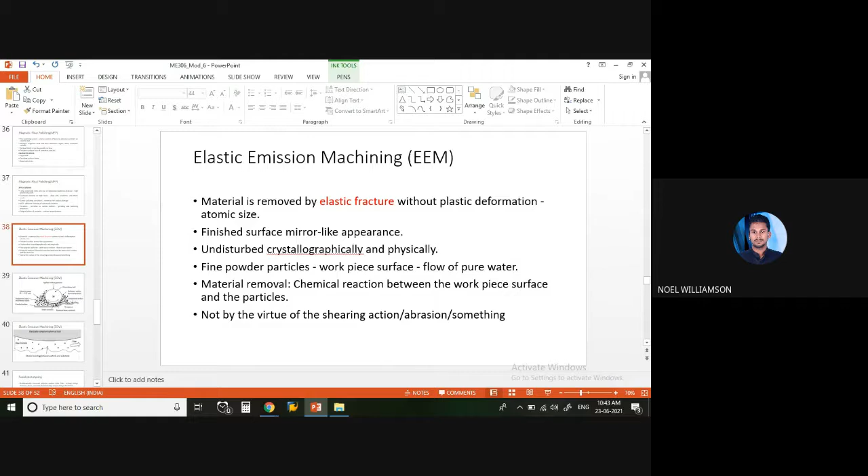So we were discussing elastic emission machining. Unlike other processes, elastic emission machining is a process of machining where the material is removed by elastic fracture and not plastic deformation. So without plastic deformation, using elastic fracture, the material is removed down to the atomic size. So that is elastic emission machining.

And you can see here, you'll be able to get a finished surface like a mirror surface. That much accurate surface quality will be obtained through elastic emission machining. And the crystallographic structure will be undisturbed.

Regarding the procedure of material removal, the material removal happens through the chemical reaction between the workpiece surface and the particles. And the particles, in the form of fine powders, reach the surface by flowing through pure water.

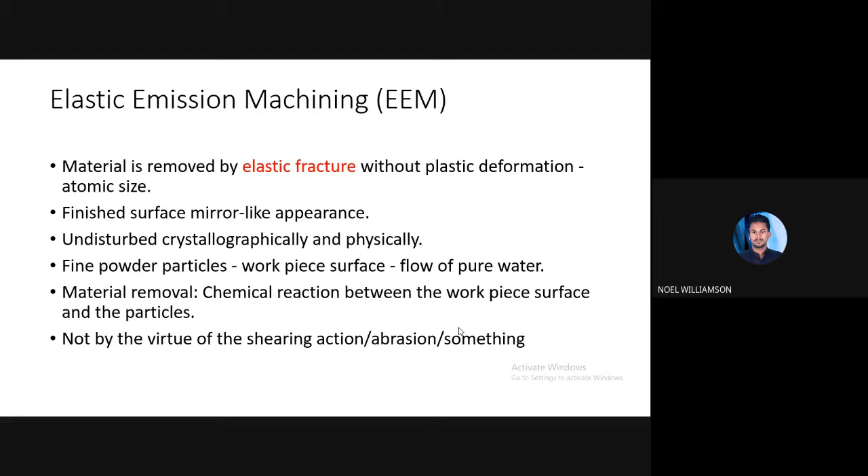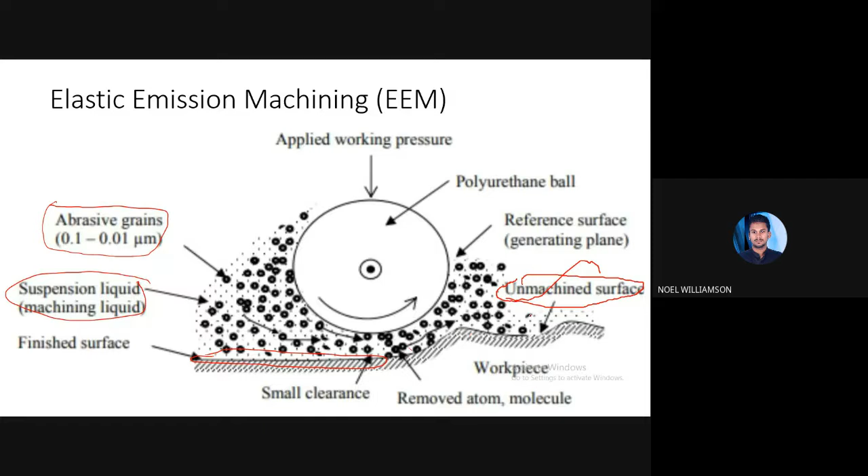Here you can see while rotating, it will be moved through the gap over here. And here the pressure is increasing, and it will be able to adjust the pressure, so that the quality or the rate of material removal also can be controlled. The same thing in a magnified manner. Okay, so that was regarding elastic emission machining.

Now we move on to some material addition processes. Material addition processes involve many operations like rapid prototyping, stereolithography, three-dimensional printing, FDM, etc. Basically these all work under the principle of rapid prototyping. So we'll see what rapid prototyping is and how it is done.

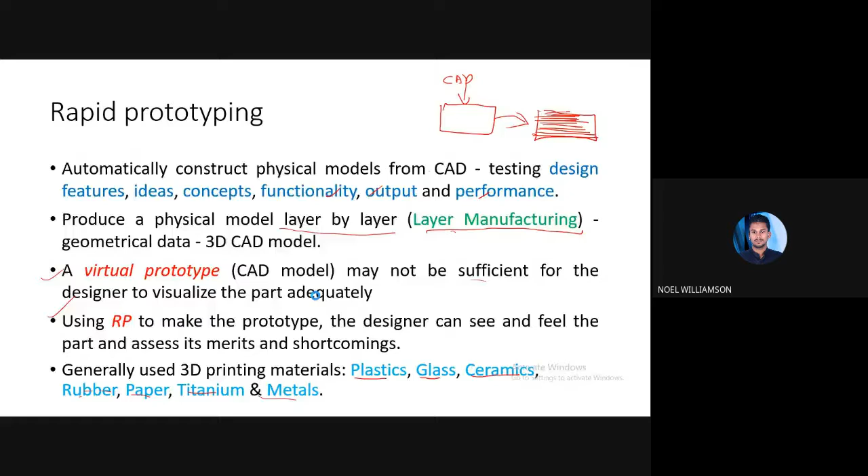Now these are the two differences between conventional machining and rapid prototyping. So in conventional machining, if we want to have a particular geometry like this, first of all, initially we take a part. From that we will remove the surface, machine the surface, and form the final product. So by removing the material, that's why we call it a subtraction process. We are subtracting the unwanted area or unwanted volume from the initial block. So in this case there will be a lot of material removal or material wastage.

In the next case, that is in rapid prototyping, we are just adding the material. There is no initial material available. So we create the model by adding layer by layer like this. Then in this manner, we create the final product. Okay. So we produce the model by adding the material layer by layer. That's why we call it a material addition process.

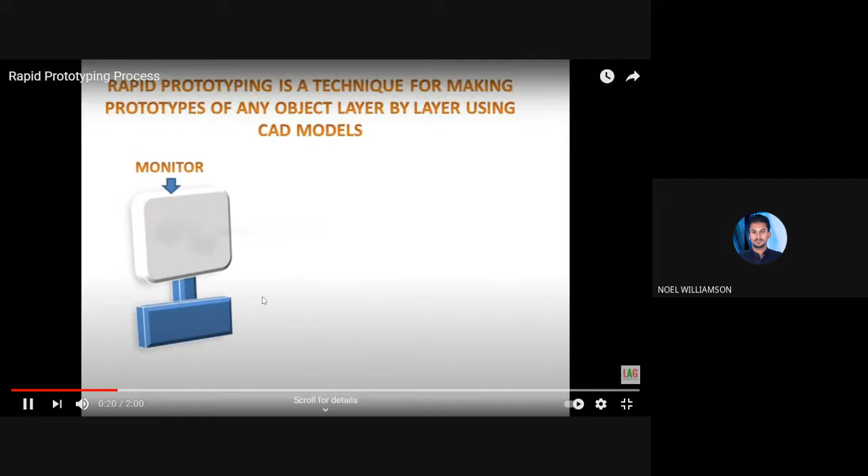Here we have a computer monitor. This is a monitor, and we have a CAD model which we will make in the CAD software. This is a 3D CAD model which we want to make a prototype of, and there is a prototyping machine. We can also say this machine is a 3D printer which makes 3D prints. This is connected by wires to the monitor.

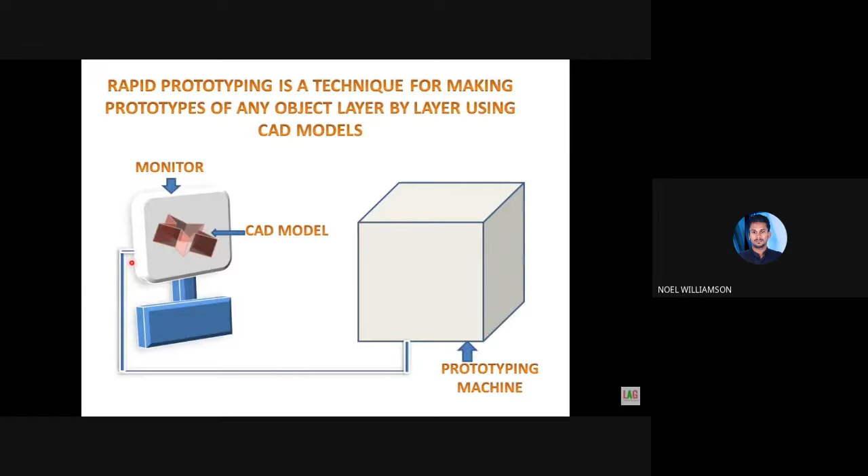This is connecting cables, and there the layer by layer manufacturing of the CAD model will be found. This machine makes the first layer, second layer, third layer of the CAD model, and by layering this model the final product will be made by this prototyping machine.

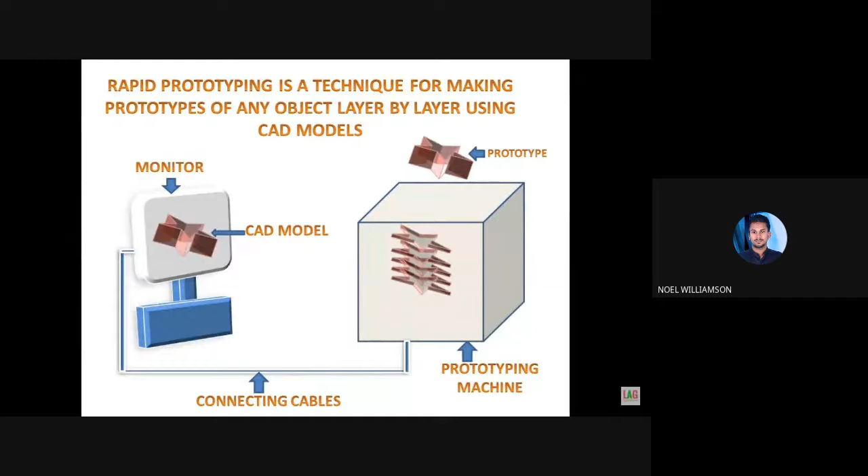So in the rapid prototyping process we will make any object layer by layer using a CAD model. By using this CAD model we will make a 3D object layer by layer and fuse it together by different means, and the product will be like this. This will be our final prototype, and this will be made by our CAD model and the layer by layer process. So this is our rapid prototyping process for making prototypes very rapidly by using a 3D printer or a prototyping machine.

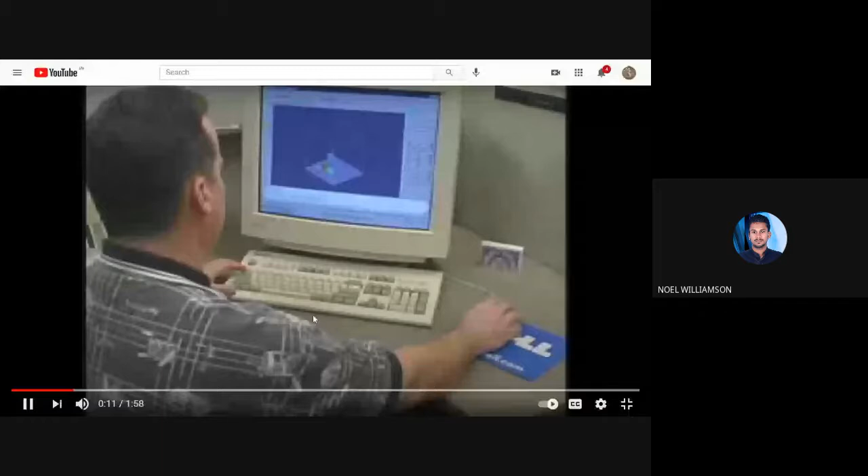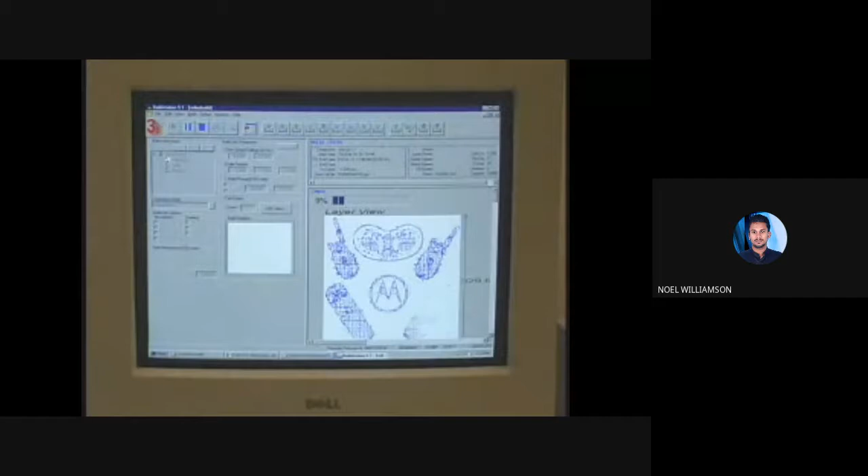With the conversion of our customer's three-dimensional CAD drawing into a file that is exclusively used for the rapid prototyping procedure. The part is virtually positioned in order to obtain optimal quality, accuracy, and fine detail preservation. Special software prepares the file for a prototype build by converting the design into thin cross-sections that map out the solid regions of the part.

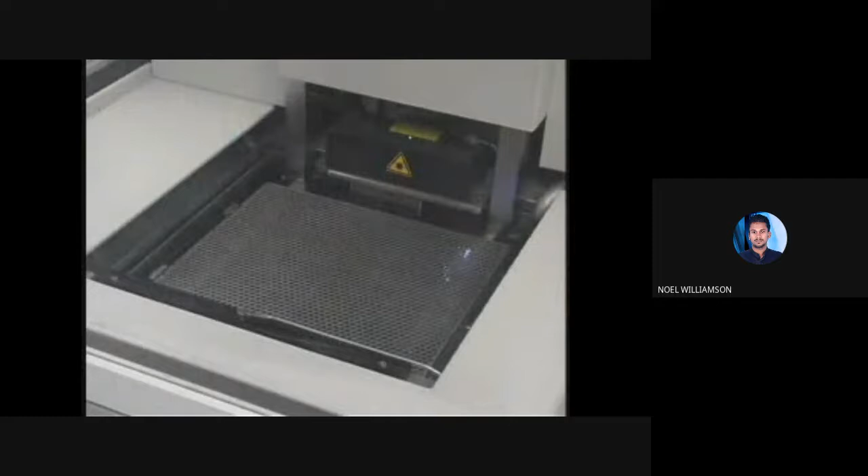When downloaded, the output file guides an ultraviolet laser beam and scans a specified cross-section on the surface of the liquid photopolymer resin. A platform attached to an elevator assembly is used as the foundation for the prototypes and incrementally indexes the platform into a vat of resin. Once the liquid photopolymer resin is exposed to the laser, it solidifies into an epoxy-like plastic material. The process is continued layer by layer, cross-section after cross-section until the part is complete.

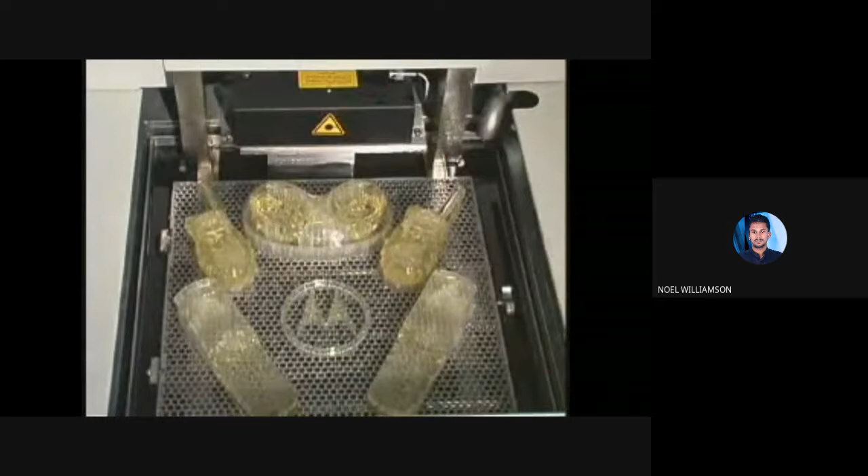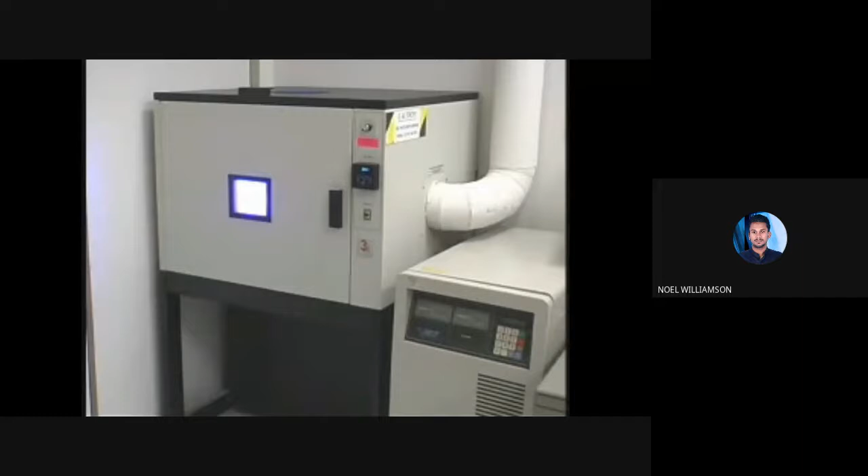Once the building procedure is complete, the prototype part is removed and processed through a solvent rinsing system to remove residual and uncured resin. The part is then cured by placing it in an ultraviolet post-curing apparatus. After finalizing the curing process, the part is ready for hand finishing, sanding, bead blasting, and painting, dependent on the intended use of the prototype as specified by our customer.

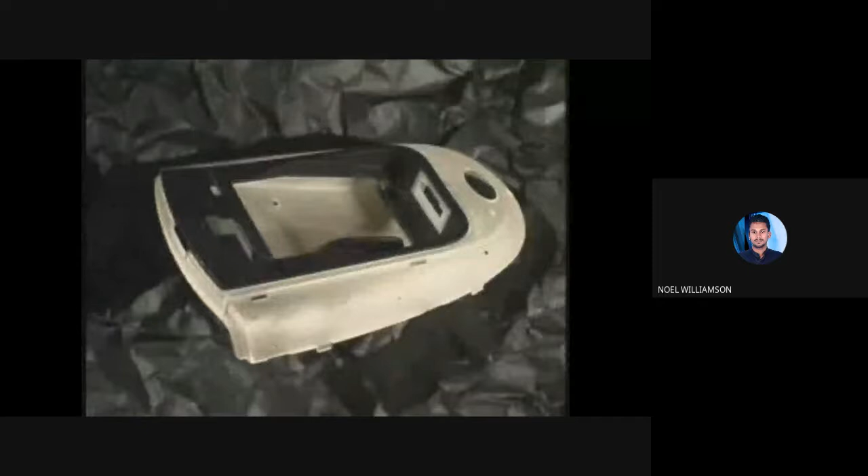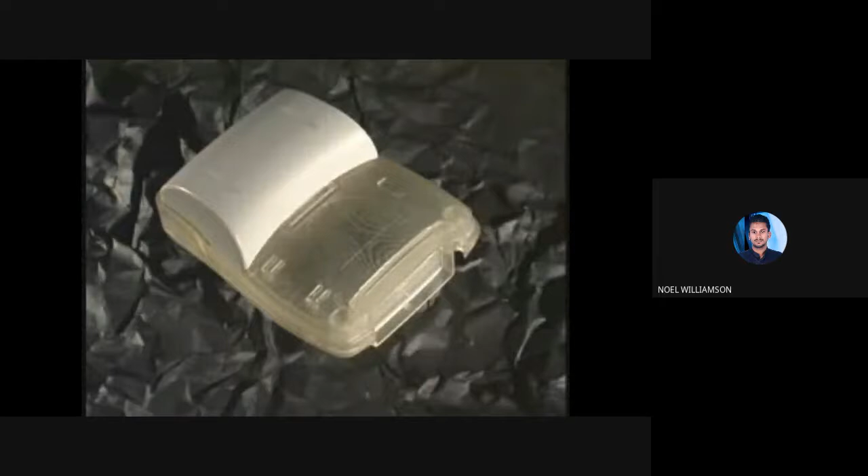With 10 years of experience, our rapid prototyping team has the skills and resources to provide our customers with accurate and professionally refined prototype parts that can be utilized for design verification or tooling aids, analyzed for fit, form, and function, or exhibited for promotional purposes. Contact us to quote your next rapid prototyping project.

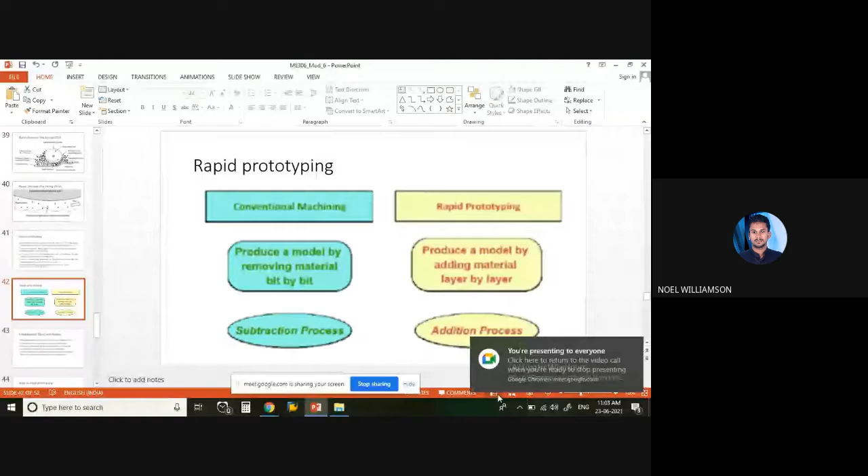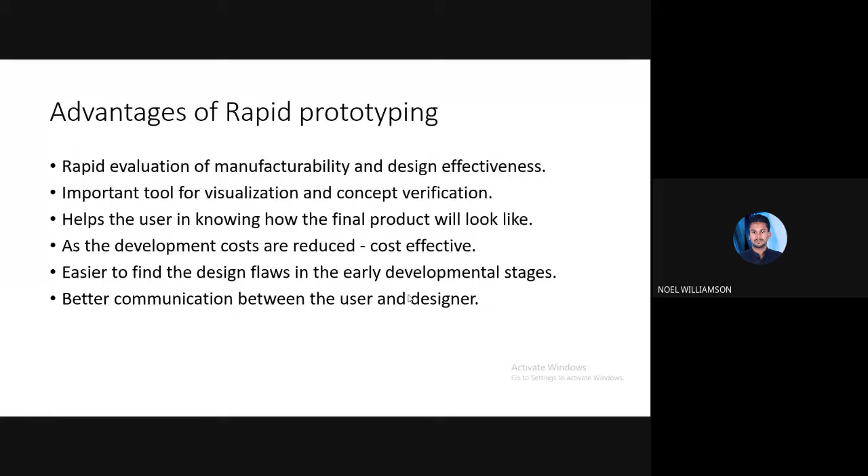Then the second step is, from the CAD model created, we convert this model into STL format, or another format which is known to the particular machine. So first we create a 3D CAD model, then it is converted to STL format. Next is slicing the STL file into thin cross-sectional layers.

We know the basic procedure of any rapid prototyping is creating layer by layer. So layer by layer analysis will be done, and then it will be added to form a final product. So the third step is we slice the STL file into thin cross-sectional layers, and construct the model one layer on top of another. So layer by layer we add and construct the model.

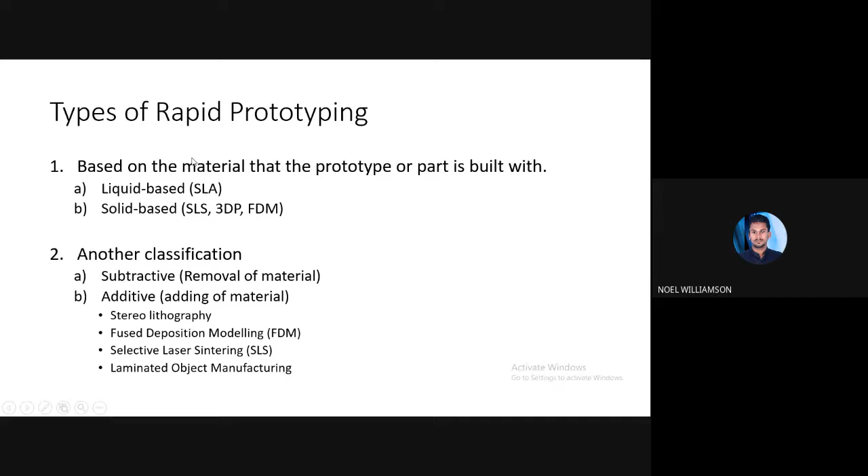Now we will see each process one by one. First of all, we will go on to stereolithography apparatus, SLA, that is a liquid based rapid prototyping technique. That I think we will continue in the next class.